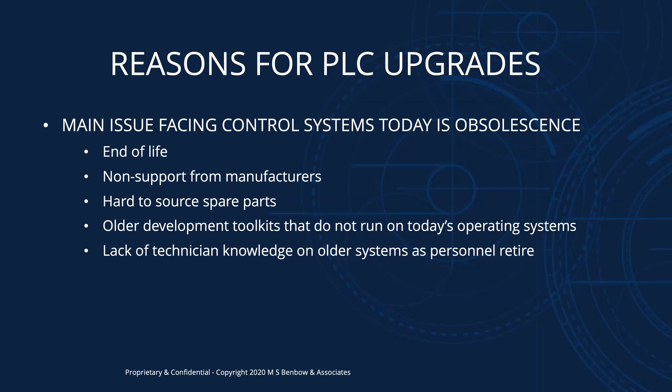programming device, hardware device. And then kind of wrapping up this slide here, lack of technician knowledge on troubleshooting, maintaining, making changes to older systems, as a lot of these people who are familiar with these systems have retired, have gotten laid off, or have died, quite honestly.

And this obsolescence, as technology advances, there's no one company that's immune from this. Rockwell, Allen Bradley, the old General Electric FANUC line, 9030, 9070s, Texas Instruments, which was a system that was ultimately bought out by Siemens, ICS Triplex, which was bought out by Rockwell on the triple modular and fault tolerant side, Modicon, keeping their legacy 84 there with their 984 and 800 IO series, as well as many others. So across the board,

it's kind of like the nuclear arms race, right? As soon as somebody builds a better nuclear weapon and delivery system, somebody else is going to develop something to defeat it. So it's inevitable.

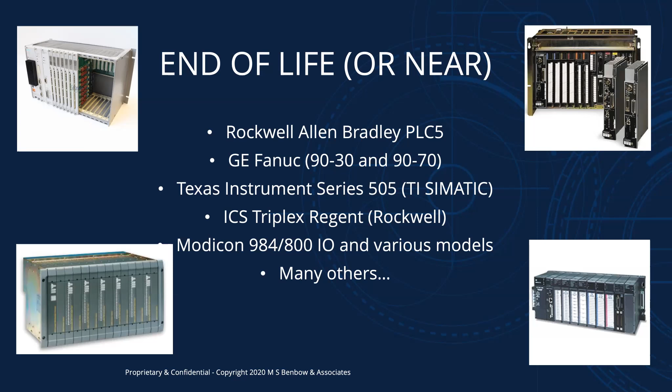As far as applications go, again, somewhat of just a snapshot. There's many other applications as well, but sequencing and protection, batch control, process control, manufacturing, auto manufacturing, integrated circuits, rotating machinery control, gas and steam turbine control, compressor anti-surge control systems, as well as SIS systems, or safety instrumented systems.

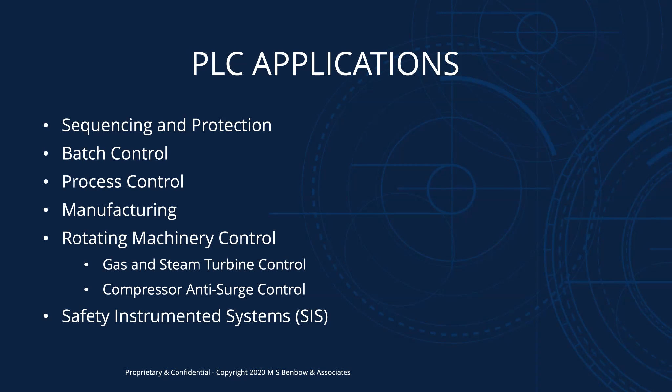So the PLC has really come a long way from just strictly being a relay replacement device to being able to run a host of flexible programming languages in addition to its own native programming languages. And if you look here, you've got a full suite of the IEC 61131 programming languages: ladder logic, function block diagram, sequential function charts, instruction list, structured text, as well as other languages which certain PLCs or programmable systems can run. For instance, C programming language in addition to their own brand specific or native programming languages and environments.

And everybody's familiar with the ladder logic. The beauty of this initially was that the people in the field, the technicians, were very familiar with troubleshooting, making changes in much the same way you'd wire up a relay. You'd put together your ladder logic.

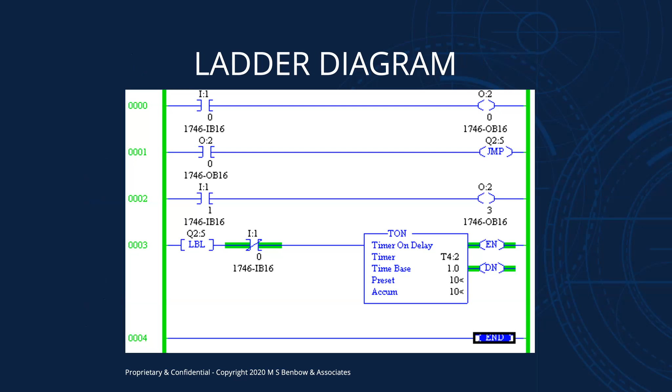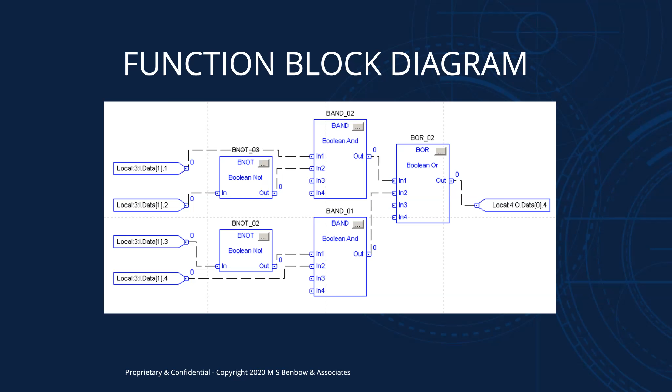Then function block programming, which really has kind of come into its own over the past, let's say, 10 years or so, with the amount of flexibility, and as the library of function blocks continues to grow, and the ability to develop your own proprietary function blocks as well. Sequential function charts, which is kind of more of like a flow chart style of programming.

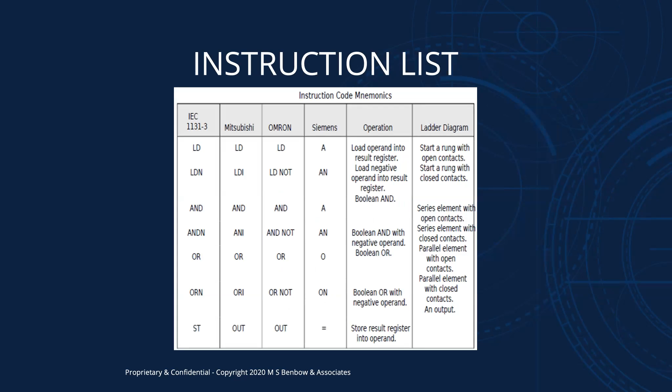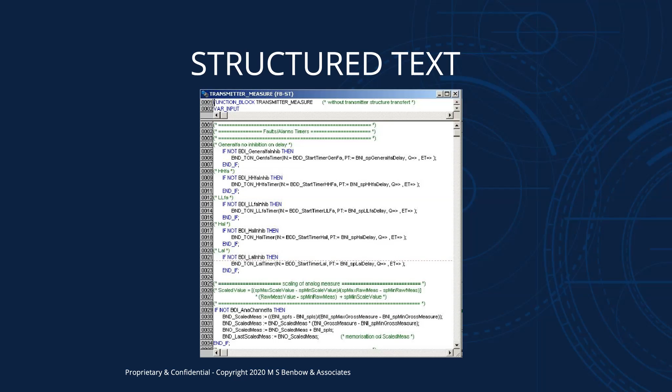Instruction list. Here's one you really don't see a lot of anymore, which I'll liken more to kind of an assembly language or lower level programming environment. Structured text, which is somewhere between a basic style programming language, but not quite as sophisticated as some of the higher level programming languages like C, which gives you a lot of flexibility in terms of data structures, access to inputs and outputs.

So, one of the nice things about the C programming language, when it first came out, it was one of the first higher level programming languages that really gave you access in a pre-developed way to the outside world via input and output structures and pointers.

So, okay, we've talked about some of the reasons why we're going to upgrade. Now the question is, what are we going to do? How are we going to do it? What is the approach that we're going to use to upgrade our system? Specifically, what type of PLC are we going to go with? And also, what SIL rating do I need? What safety integrity level will meet my objectives with respect to availability, with respect to safety?

So with respect to what type of PLC I need, some of the determining factors, and really some of the most important ones, is you want to look forward with one of your ultimate goals being standardization. So what is the prevalent PLC at your facility or at your site or company-wide? And what PLC is the enterprise transitioning to or will transition to?

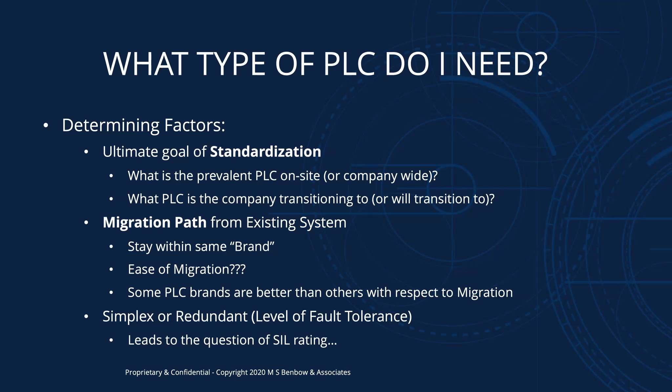And another thing to look at, what are we going to go with in terms of redundancy? Does a simplex application meet our standards or our requirements, or are we going to have to go to some level of fault tolerance, whether it be a hot backup, a dual redundant system, a triple redundant system? Are we going to do that just on the CPU level? Are we going to do it on the IO module level? Or are we going to do it on the field device level? So a lot of questions there, and a lot of these questions lead to the question of SIL rating.

So kind of talking about standardization, okay? And again, back to the first bullet item on our last slide with our ultimate goal of standardization. A lot of advantages on standardization, looking at, for example, spare parts commonality, okay? If we can reduce our spare parts inventory, we're going to go a long way to minimize what I refer to as really a hidden cost.

So if we can standardize on the PLC across the board, we can maintain a smaller inventory of spare parts for a larger number of PLCs. So for example, we'd only need to maintain a few analog input modules in inventory to back up many systems, as opposed to if we had several different PLCs requiring several different analog input modules.

And before long, it can significantly add to your inventory cost and also the complexity of having to maintain several different types of what's conceptually the same piece of hardware, but just for a different system. Take a snapshot here, and these are just kind of ballpark prices, but it's pretty illustrative of what you're dealing with here for a system.

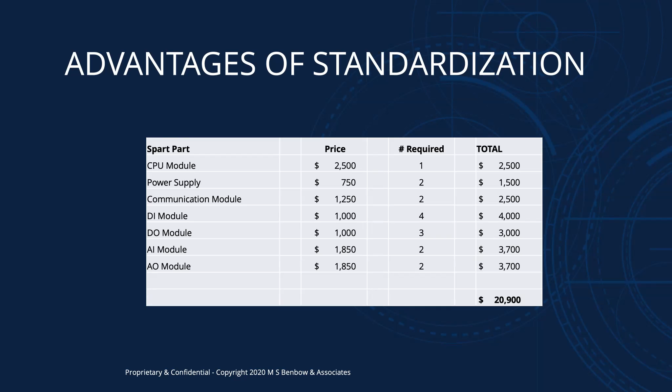And kind of along those same lines, the same applies to the software development toolkits, which can also be quite expensive. If you have several different brands of PLCs at the facility, that means that you're going to have several different engineering development toolkits for developing logic, for making programming changes, for troubleshooting, and a lot of times even within a particular brand of PLC, you may require several different versions depending upon which versions of CPU or which hardware versions

Human machine interfaces, HMIs, whether it be some type of more generic HMI platform such as Wonderware, or a lot of PLCs have their own specific HMI development environment and hardware, which is more tightly integrated with the software that you're developing on the PLC, which cuts down the configuration and the programming time on the HMI end with respect to the development of the tag name dictionary and so forth. As well as communication interface.

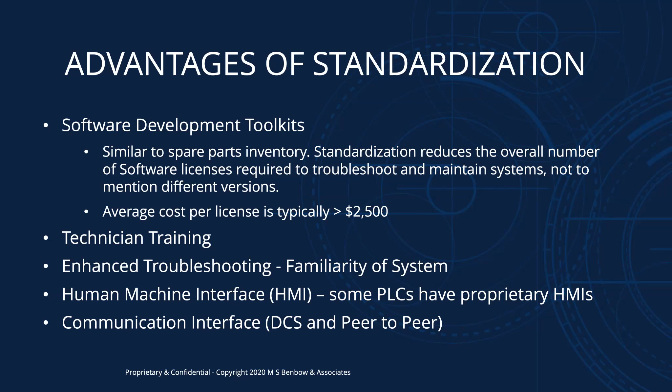So migration path, okay, how are you going to get from point A to point B? How are you going to go from your older system to your newer system? Well, some systems are easier than others to upgrade. Now, this is just one I picked. There's others that have their own pluses and minuses as well. But several different Modicon product lines have conversion routines for upgrading the current control software that's running on the older system to run on the new system.

Now, would I run that conversion routine and just go ahead and put it in the new system and hit the start button? No, absolutely not. But it does make the task of updating the software significantly less labor intensive. And these can be applied to some of the older Modicons, to the newer M580s, as well as Modicon has some conversion routines that'll take the older AB PLC5s and modify and convert that software to run on the new Modicon M580s as well.

On the field side, there's also some modifications, and again, others. This is just an example from Modicon, but other manufacturers offer this same type of technology to be able to take your old existing IO modules and upgrade that to the latest offering from the company, and to be able to do that without disconnecting the field wiring device is of significant value.

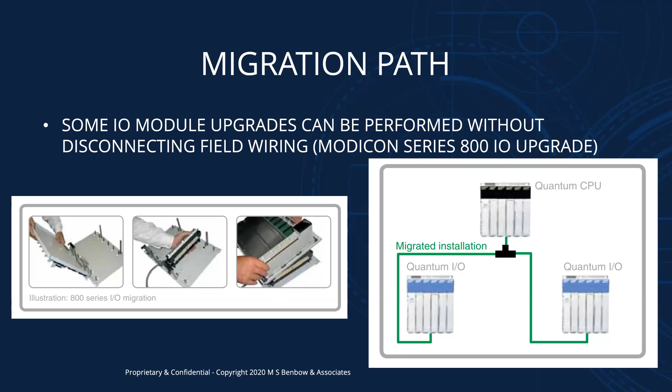And the new IO was connected via ribbon cables to the old termination block. So really, an advantageous tool to use when updating the IO portion of these older PLC systems.

So looking at safety integrity level, or SIL, the question comes up, what SIL rating level do I need? The safety integrity level is defined as a relative level of reducing the risk, which is provided by a particular safety function. A lot of times you specify that target beforehand in terms of your availability. But a lot of times if you ask the client what SIL level or rating do you require, they'll say, "Oh, give me the highest."

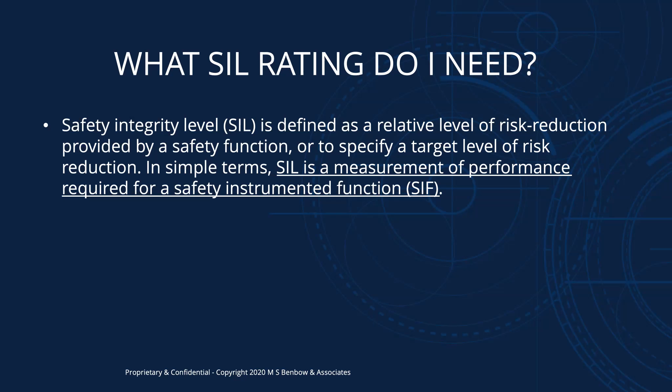Okay, well, the SIL rating itself is a measure of performance required for each individual SIF. And by SIF, I don't mean software implemented fault tolerance. Really what I'm talking about here is the safety instrumented function itself. You could just think of that as the loop or the encompassing equipment that goes from detecting a certain situation to acting on that certain situation. So a safety loop is another way of thinking about the safety instrumented function.

If you look here, for example, a high pressure shutdown, you would start at the pressure sensing device itself, which goes into the PLC module, then the PLC processor and program. The solution is sent out via the PLC output module, and then ultimately to the shutdown device itself, whether that be a valve, a pump, a compressor, solenoid, relay.

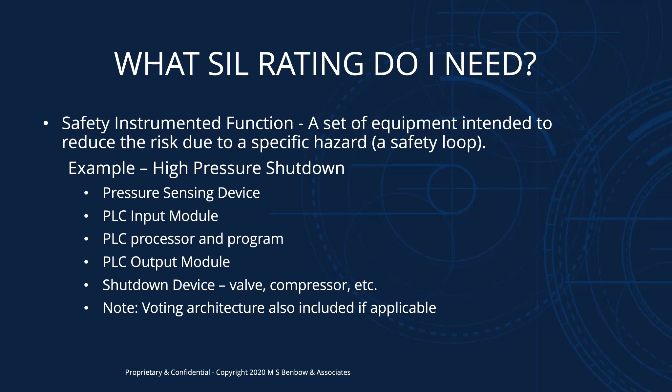And note that the voting architecture itself is also included in the calculation and the safety instrumented function if it's designed into the system. So if you would have, for instance, dual or triplicated input modules, some type of fault tolerant output module, valves in series or valves in parallel, depending on what your requirements are, all that would be included in it.

So how many safety integrity levels are there? Well, most of us have only heard of or are familiar with safety integrity level 3. There's actually a fourth one as well, SIL 4, but SIL 3 is the highest level that is economically feasible.

And again, I'm sure we've all had conversations with clients when it came to fault tolerance: okay, what level of triplication do you require? What level of fault tolerance do you require? It's like, well, I want it all triplicated. Okay, well, what do you want me to triplicate? The CPUs, the IO modules, the end devices? And when you give them a price for it, like, okay, well, what can we do to reduce this price? Maybe we don't have to be that safe.

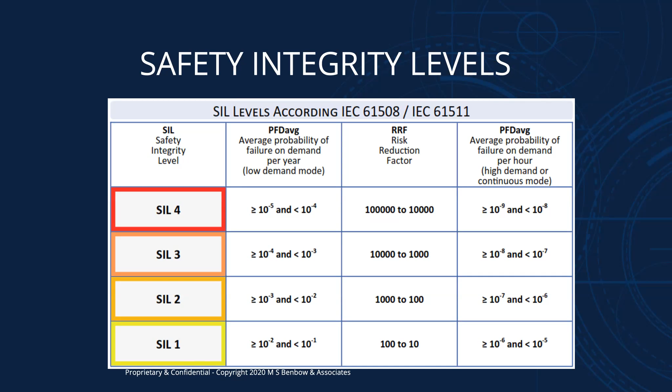So you could look at it as the probability of failure on demand, or also the risk reduction factor, where one is the reciprocal of the other. So again, example here, you've got a risk reduction factor of 1,000. The SIF would fail during a dangerous scenario or when called upon to actuate once every 1,000 years.

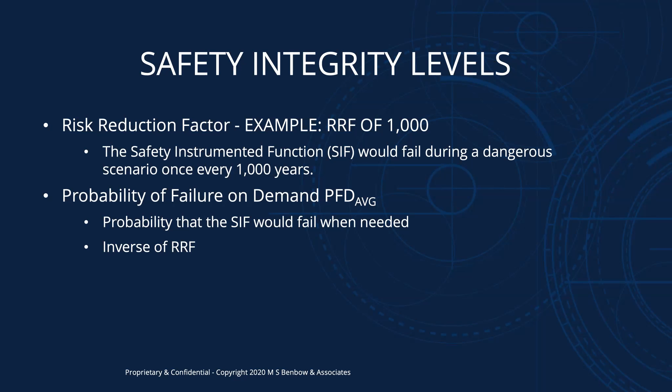Now, what does that actually mean? Well, I could almost take two hands to count the number of 500 year floods we've had over the past 20 years or so. So that really needs to be taken with a grain of salt. But again, the other way to look at that, the inverse of the RRF, would be the probability of failure on demand, and that's essentially the probability that the safety instrumented function would fail when called upon to protect the system.

And how do you go about this, determining the SIL level required? Well, there's a lot that goes into it, actually. The risk assessment, PHA, layer of protection analysis, and determining, based on what your availability targets are, the realistic test intervals, and whether those test intervals are implemented automatically through the control system itself, or some type of software implemented test interval, or manually, and whether that is online test intervals or offline test intervals.

And a lot of that is really determined by what the test intervals are with respect to what's required to meet your availability targets. For instance, if based on your analysis, your testing intervals come out to be of a shorter interval than the turnaround time of the particular piece of equipment, then you need to do one of two things. You need to shut down that equipment more often to implement your testing to meet your required SIL level and your availability targets, or you need to design into the system the ability to conduct online tests,

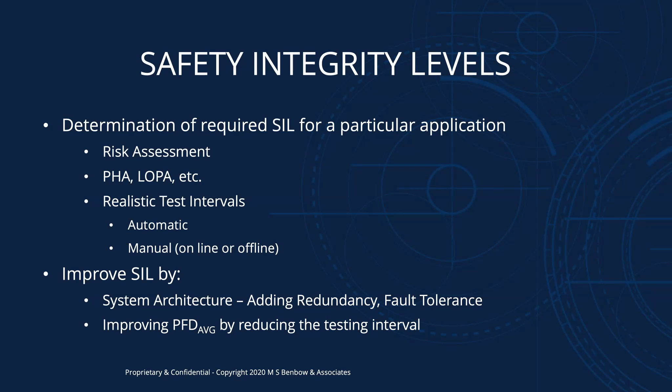A little bit of a caveat here. It's important to understand that just because you buy a SIL rated piece of equipment doesn't mean that that safety instrumented function, or worse yet, your entire system meets that particular SIL rating. And not picking on Rockwell here, actually I kind of applaud them in making this clear. They've got a 200-page manual just to explain how to use the ControlLogix systems in a SIL 2 application, and kind of called upon here with, this equipment, while rated SIL 2, it's rated SIL 2 if you pay attention to and understand how to integrate this into your overall SIL rating strategy. So, important point to note.

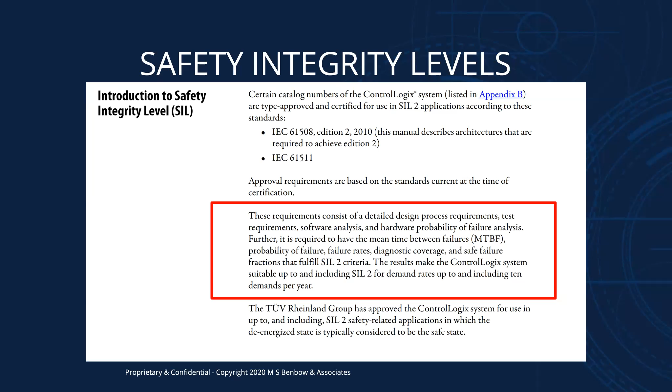There's a variety of SIL calculation software toolkits available out there. We've got quite a bit of experience with SIL Solver by SIS-TECH. There's exSILentia by exida, AE Shield, as well as a host of others. So a lot of those are really client specific based on what the client is familiar with or using in-house.

So transitioning to a new system, some issues to address here. The new software development environment, surely the system to develop the new software, to maintain it, to troubleshoot it isn't going to be the same as what you're updating. The legacy software, the control software, I'll say typically, really almost always isn't easily implemented into the new hardware platform. Some are easier than others. Again, there's certain migration paths that you can take advantage of and migration toolkits.

And another one, and I'm sure everybody who's worked on these types of systems on the upgrades will appreciate. I mean, existing software, I don't even know why I put usually, it's really always. It's almost always poorly documented. I don't know what it is about programmers, but they just want to get the program finished and they'll either not document it, or the documents and the descriptions of the programs and the comments are incorrect. They've gone back and changed the program, but they haven't updated the documents.

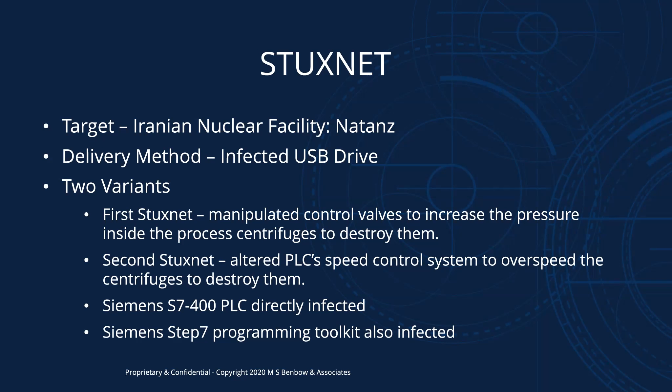I could talk about that more, but if you're interested in doing some reading on this particular instance, there's an excellent book, very interesting. The hero of the story is the computer nerd, so I kind of like it. It's called Countdown to Zero Day. It's available on Amazon.

So we've kind of talked about how to get to which PLC we're going to use. Now let's talk about the design process itself. If we're talking about legacy systems, it usually involves reverse engineering the functionality of the existing system, and that's developing the I/O list, developing a functional definition of how the control system works, and a narrative explaining that in excruciating detail. That's typically in the form of a general algorithmic description of how the software operates, both on the continuous and the discrete side of the control system.

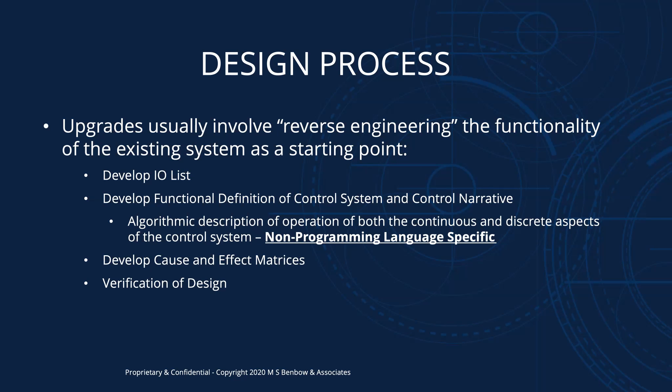It's important to understand that this should be a non-programming language specific description, so everybody can understand how this works, the technicians, the operators, without having the knowledge of any high-level advanced programming language. And as a follow-on to that, for a more descriptive explanation of how the discrete side works, developing the cause and effect matrices, and ultimately coming up with a verification of design.

So verification of design really encompasses, what is the system supposed to do? And I'll caution you here that you really need to pay attention to the carryover of errors, both hidden or latent errors and things that were supposed to work that were maybe never tested, that didn't work, or things that the client thought was implemented but was not implemented or implemented correctly with respect to functionality.

And just like anything else, once this design is done, you would conduct a very thorough review and defense of the design, and I'll liken it to defending a thesis in graduate school. It's not until this general algorithmic design has been fully vetted, defended, looked at, verified, that the programming begins. The overall goal of the software design cycle should be to reduce as much as possible the actual task of the software programming to that of a data entry task.

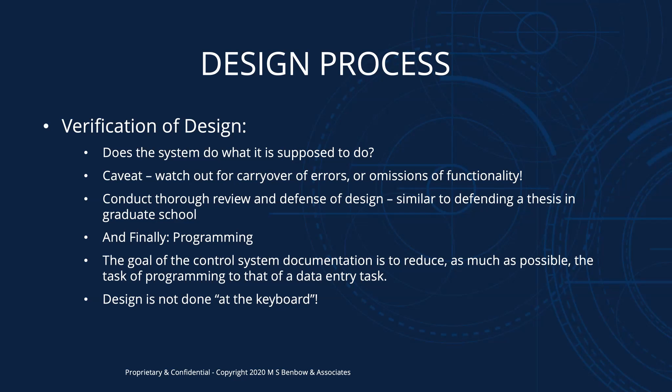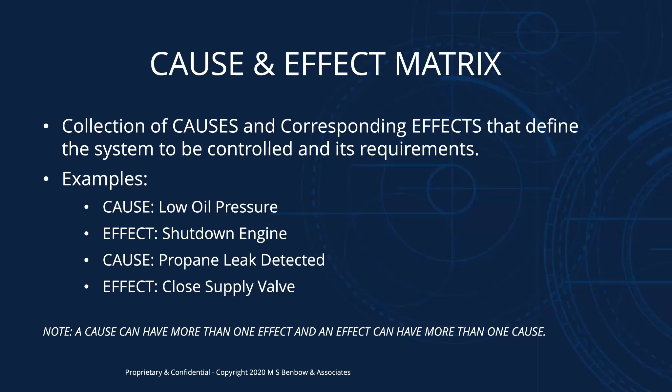What I mean by that is it's based on the control system documentation that was developed. That should be the Bible from which the actual software going into the PLC is developed. The design shouldn't be developed at the keyboard. The programmer shouldn't just sit down at the keyboard and say, okay, the system needs to do this. A straightforward example of that is the cause and effect matrix itself, which is a collection of causes and a corresponding effect. Essentially, it's a graphical representation of if this, then that.

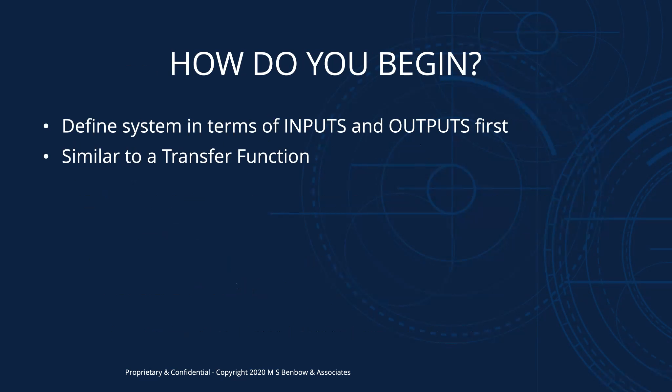I think it's straightforward enough. I know we're running short on time. I won't go over the cause and effect itself, but I will talk quickly about how you begin that. You define the system in terms of inputs and outputs. If you remember from school, similar to a transfer function, which is defined in terms of its outputs over inputs. This process would be to first define the inputs, then define the outputs, and define the relationships between the inputs and the outputs based on the system requirements, safety requirements, operational requirements, and a detailed review of the operation of the existing software.

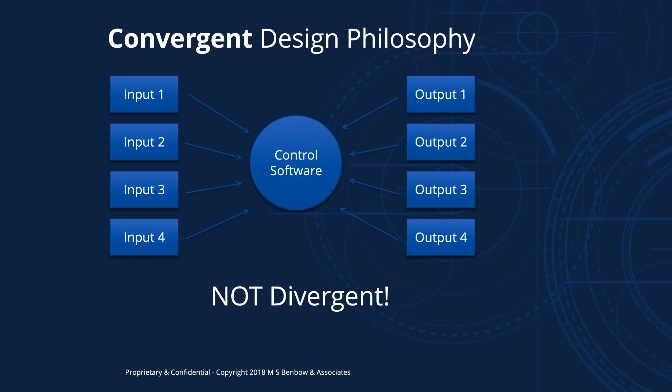To look at that, we would apply what's called convergent design philosophy, where you start with the inputs and the outputs and work toward the control system software. What you don't want to do is start writing the software and then figure out how to map that to the inputs and the outputs. That's really more of a divergent design philosophy, and I'll liken that to something we're all familiar with here, a spaghetti plot. You just don't know where all that stuff goes. If you start at the inputs and the outputs and work in, you're guaranteed to pick up all the operational requirements.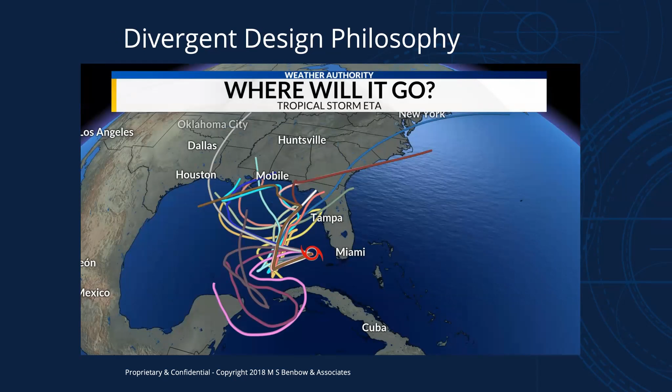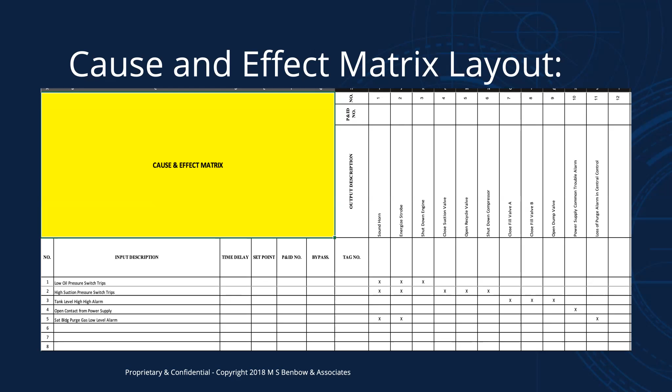So cause and effect matrix, again, I'll kind of wrap this up here. I think we're all familiar with what the cause and effect matrix looks like. Input descriptions and items on the left side, output descriptions and items on the upper right side.

So in summary, technology continues to evolve as usual. I mean, think about it. How many people have the same computer they had on their desk 5, 6, 7 years ago? Besides my parents, maybe. Many options to consider when upgrading an obsolete PLC. One of the key focused issues that you want to concentrate on is standardization. Many benefits involved with that.

Validation of legacy software is key to a successful transition to make sure there's no either carryover of mistakes or omission of functionality that the client thought was there but never existed. And this presents an opportunity to transition to a more reliable and safer system via risk analysis and the implementation of a lot of functionality and technical advantageous items that really weren't available when the obsolete systems were first put in.

So again, that wraps up things. Unfortunately, I didn't have time to go over that survey, but if anybody is interested in taking a look at that survey, you can email me and I'll reply to that with a copy of the survey itself.